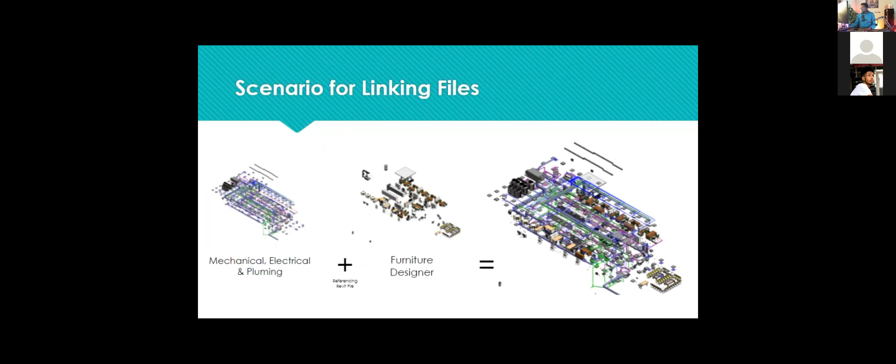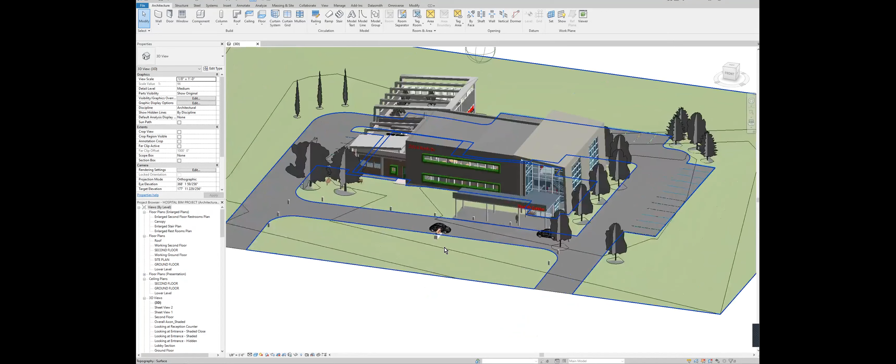So this is an example of linking files in Revit, and I'm going to show you that on another screen. Just give it a moment. So I can share a portion of my screen. Okay, there we go. And you're seeing the Revit screen now. All right, so this, for example, is a project that has elements that are linked.

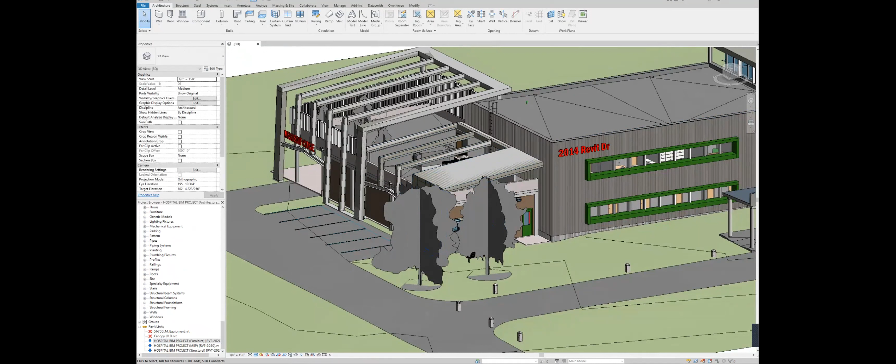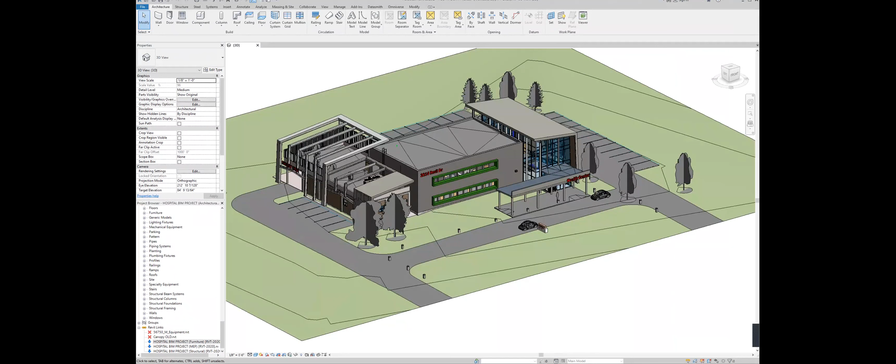Now, from what you can see here, this is the architectural component of the building. But if you look down in this corner here, which I know you probably can't make out the text, you can kind of see where these files are linked. And what you can see linked is the furniture, the mechanical, electrical and plumbing, and then the structural, all linked together.

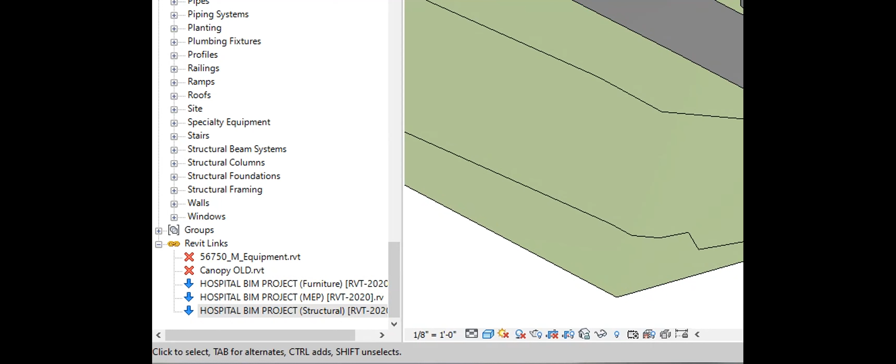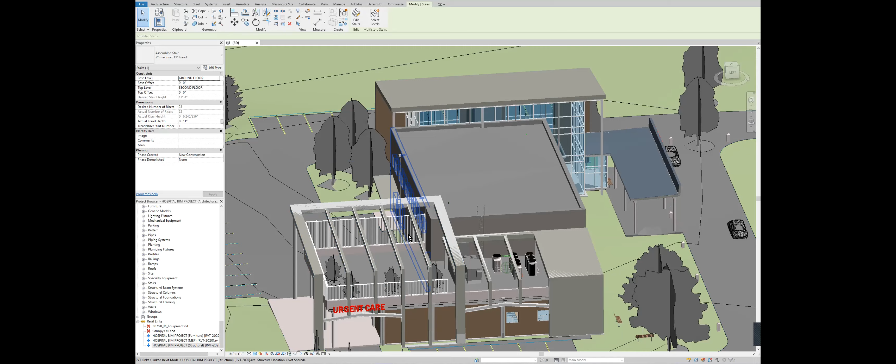If I kind of zoom around here - I think this is moving this, oops sorry, I need to maximize this. I'm going to try to zoom in and zoom out so you can kind of see the differences here. All right, so you will notice that there are MEP elements in this drawing.

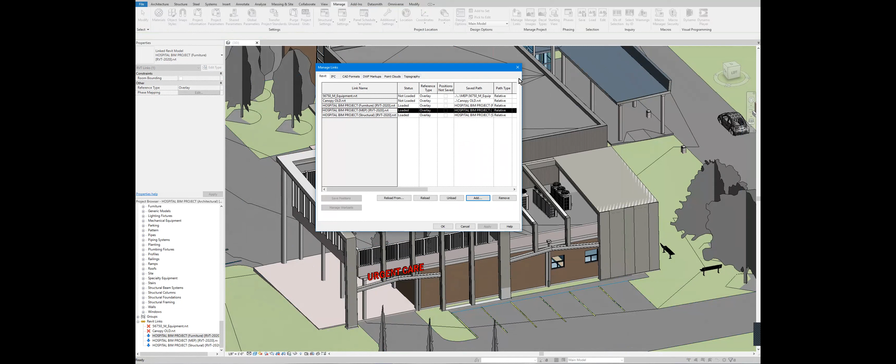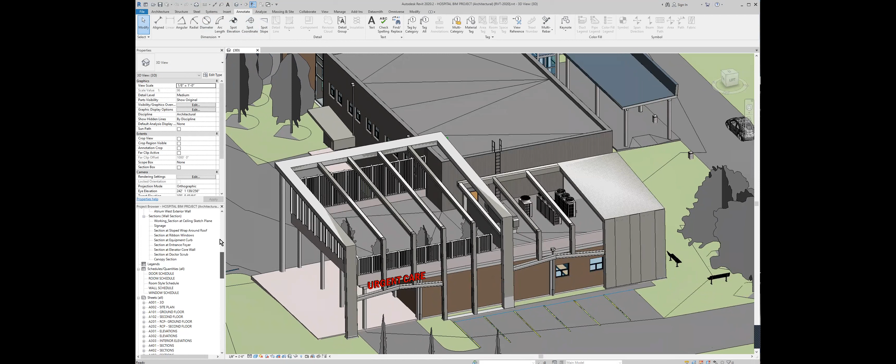And what I'm going to do is go to Manage, and manage links. There are our links there. And what I'm going to do is... this Zoom is kind of blocking my icons, give me a sec, there we go.

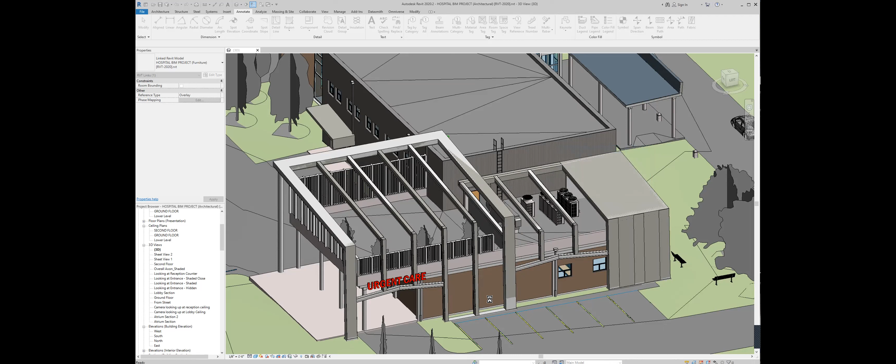Yes, I know Revit. I know. Let's let that load in.

This is all the furniture laid out in that project, and this is another Revit file, just the furniture. In placing this furniture, let's say it's an architectural designer in the office who's only responsible for laying out the furniture. What they would do is reference the previous drawing, which is a linked drawing.

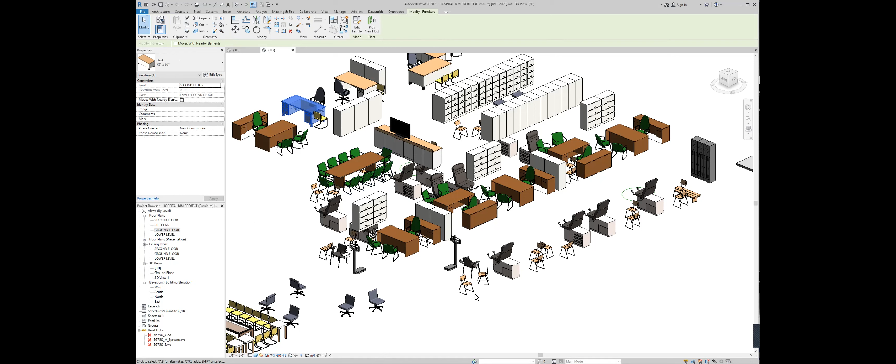I should probably open more than one Revit so you can see it in action. Right now that reference isn't linked because it's turned off, and only what this person adds is what's seen here. This person can enable the entire architectural segment of the drawing, or disable it - that's essentially what linking is. You reference the original file, and then add your layer on top of that layer. That's mainly the traditional way of doing it.

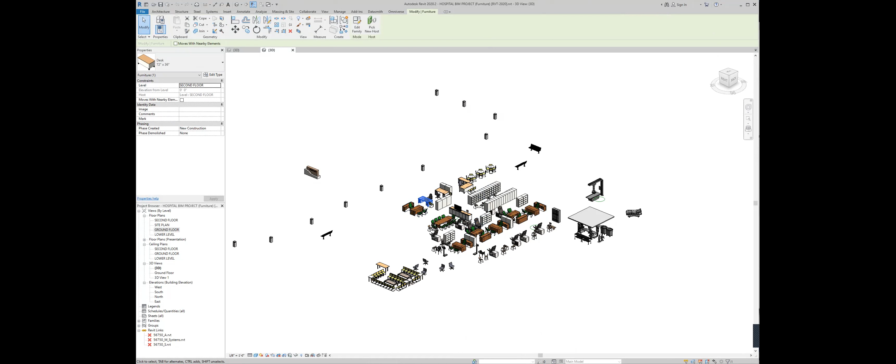Let me switch back here to this guy right here. Essentially what you do is say, well, the mechanical plus the furniture equals mechanical and furniture.

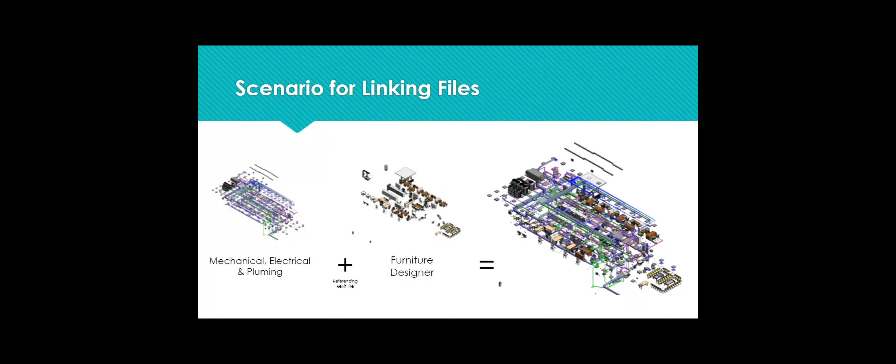The two files, you can't edit. The person doing the mechanical can't edit the furniture designer's work because that's a different file they have working with - that's a different Revit file. So at the end of the day, those are individual files that individual persons work with, which you can kind of see here, there they are. These are the different files, and one person has this file working with, another person has that file, and so forth. But the disadvantage of working this way is that you can't edit each other's files.

So if a wall needs to be moved, you have to call your team member. We have to tell them, all right, Donald, can you move that window in that wall? Which is going to be kind of annoying to do every single time.

Now the scenario for work sharing is that it allows multiple team members to work on the same project at the same time. This is what we're going to be doing for this major project. Essentially you have one central model, and then you have what's called work sets. Work sets are kind of like layers.

For those of you who have been using Revit so far, I guess you realize Revit doesn't really have layers, right? It's not like AutoCAD or Photoshop that has layers. But it has layers in the form of work sets.

A workset is like saying, hey user one, you own layer one, user two, you own layer two. Though they own it, what they're really doing is issuing permissions of access to modify that part of the model. So user one can say, okay, though I own this section of the building, I can allow anybody to modify this part, or I can say no, I don't want anybody to mess with this part. Or an administrator can override that and say, okay user one, I'm going to open your section of the building so any user can modify that section.

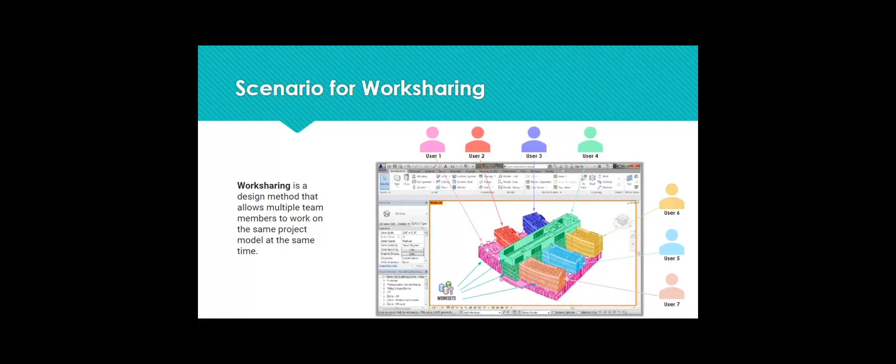All right, are we understanding so far? Any questions? No, sir. Nope. Okay, all right. I hope we're all here - I mean it's only about 4 of us, but anyway, proceeding.

Now how this works is that there is a central file, and for that central file, all users would need to have access to it. So it needs to be in a location you can access - on a network, in the cloud, somewhere where user one and user two, though they have different computers running, can go to a common location to access this file. So that's the first thing.

Now what happens is Revit will enable the feature of work sets, and what work sets does is divide the model into different sections. By default, you have to set this up - it's like layers, like when you open, what program do you guys use?

Everybody in here use AutoCAD? You've used AutoCAD before? All right, everybody's used it before. Everybody in here use Photoshop? So that's one example.

When you open up Photoshop, you have a layer working on. You can decide to do everything on that layer, or create a new layer so you can better control your model. So what worksets does is give you the ability to create these quote unquote layers, but it's not created by default. By default, the entire model is one big layer, and then you decide what section is divided into what section.

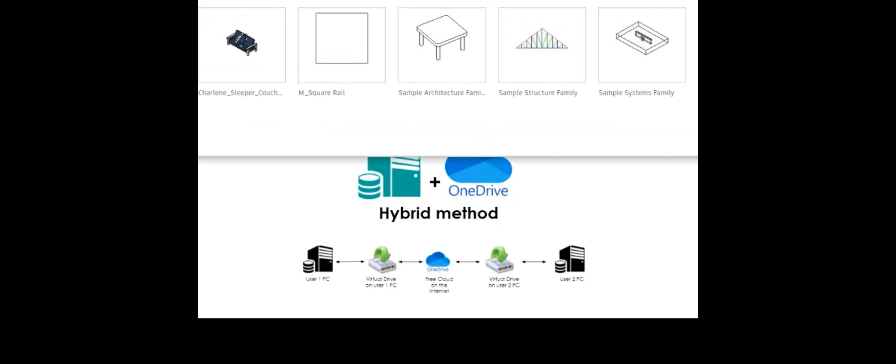And how I will do it is I will close this. I'm going to use this interesting method here. I need my mouse, one sec. All right, so I got a laptop and a desktop, and I have like two mice here, so I'm simulating fully what it will be like to have two persons using this. So you just need to multiply this process by everybody else, right?

I'm going to use a program called AnyDesk. Now, this program I think everybody needs to have, because if you experience any technical problems, this is how I'll be able to help you solve this by getting access to your computer.

All right, now what I'm gonna do is, there we go, kind of share this. Setting this up. Change my paper background to, where is the thing, to a color. Yeah, all right.

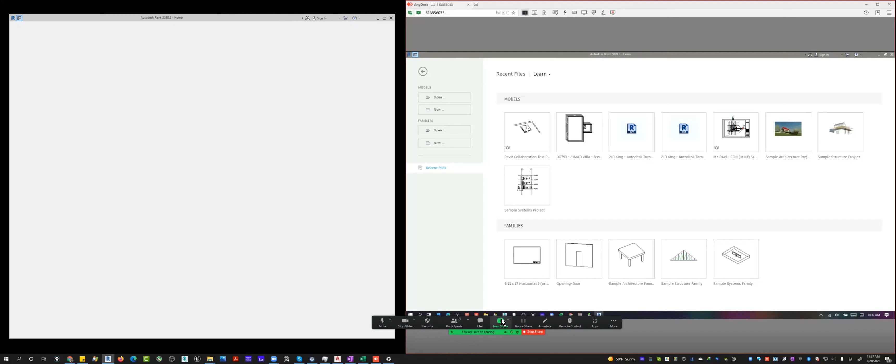All right. Okay, now I need to share this in high resolution mode, so let me do that. There we go.

All righty, I'm gonna put this in the middle here. I'm gonna try to do this very interesting setup here. Okay, now what I have here is, carry this over somewhere. So there are two computers that you're seeing here, right? On the left is user one, the desktop, and on the right is my laptop. I'm using the laptop via the AnyDesk application that allows me to remotely use the computer, so it's fully acting like a remote computer. And both of them are connected to the internet.

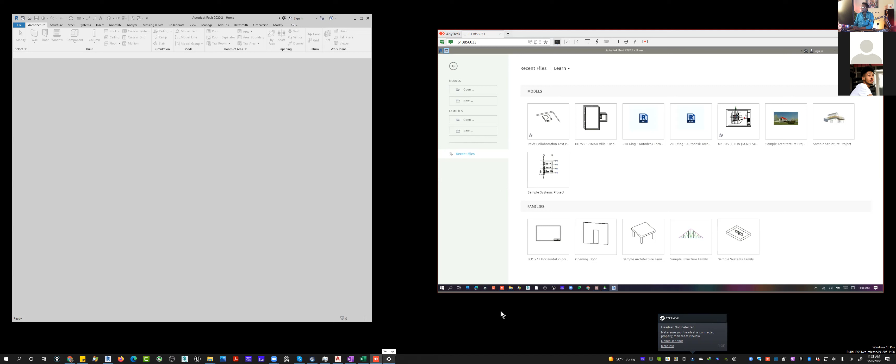All right, okay, so let me change my sharing method to one that I can zoom if necessary. If I need to zoom into a particular thing, I can just do something like that, and it will zoom, and I can zoom out like that. All right, good, lovely.

Okay, now the first thing is that you guys are going to need to access the virtual drive software, and that should be on the website. Let's jump over to the website real quick. All right, and student computing, and we're going to go to BIM. Hope it's still there. Try and locate that quickly.

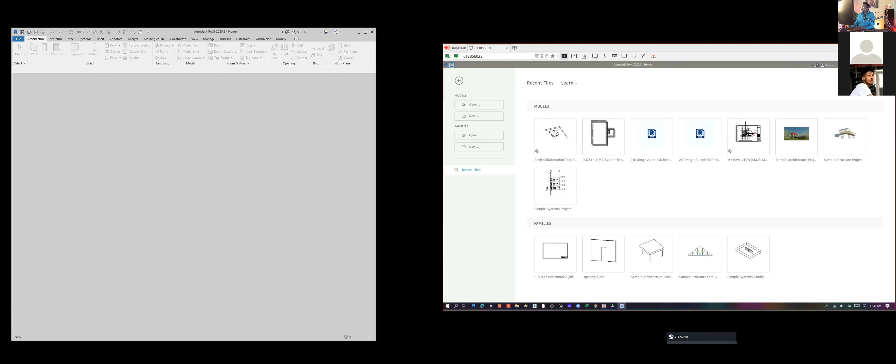All right, there we go. So when you go onto the website, I'm just gonna switch monitors here real quick, make life easier. There's a quick switch button that Zoom has. Okay, so when you go to the website...

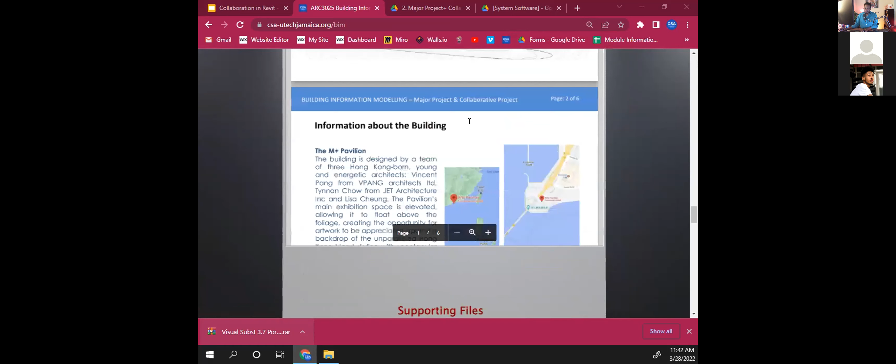This is the website that we have here. We're gonna scroll all the way down till you get to individual and major project. You continue scrolling down, and right below the handout section, where you see supporting files, you will see a compressed file that says Visual Subst. All you're gonna do is just click it, and then click download.

There we go, and it will be in a zipped file. When you proceed to that zip file, you're gonna need a software called WinRAR, which is like WinZip—it's a program that compresses files.

Let's wait on this thing. Yeah, right. So this is what that file should look like when you have WinRAR installed. All you have to do is extract this, and you extract it by right-clicking and saying extract—this is how you extract files normally. But for this one, you're going to need to use WinRAR.

And I'm going to choose where I want to extract it, which is that same location. Actually, I can just right-click and say extract here. It's going to ask you for a password, which is 1234. And there you go—you go into this folder here, and that's the program right there. All you have to do is just run it from that folder. You can put this folder somewhere where you can remember it, because this application needs to be running in order for you to synchronize with files.

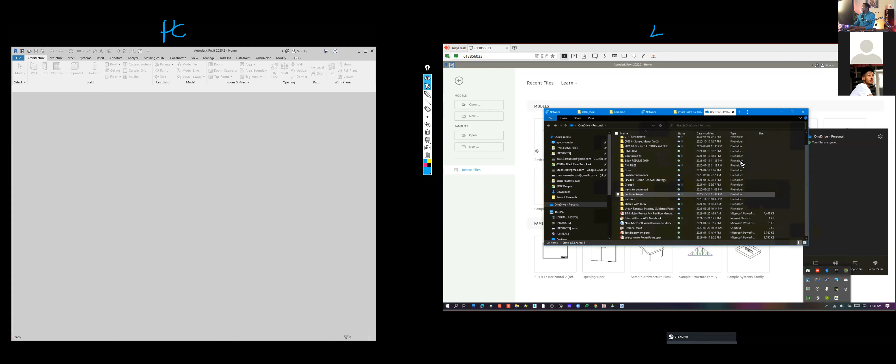On the laptop, the first thing you're going to do is make sure you have OneDrive set up. After you download it, make sure you have the virtual program. If I look down here on my bar, I'll see I have OneDrive already set up. I can double click that. This is what my OneDrive looks like. OneDrive comes with Windows, so you probably notice it pops up and gives you all kinds of annoying things usually.

Now on the desktop, which is here, we go. OneDrive, just waiting... There we go. This thing is kind of blocking me. There we go, good. So here we go, this is the OneDrive on the desktop. So it's all set up and good to go.

Now, basically what you're going to do is create a folder on your OneDrive. This is the BIM Manager folder. And then they're going to share that folder with everybody else, and that folder will be the basis of where all the files are located.

Now this process, I'm going to encourage the BIM managers to do on the internet, meaning in a browser, not on the computer. It makes life way easier. So on the computer, you want to ensure that everyone has OneDrive installed, definitely, but when you're distributing that shared folder to the different group members, I want you guys to do that from the cloud. I'm going to assume that the laptop, which is where you see the L, is going to be the BIM manager's computer. So let's say that's the person that's going to host the central file and share it.

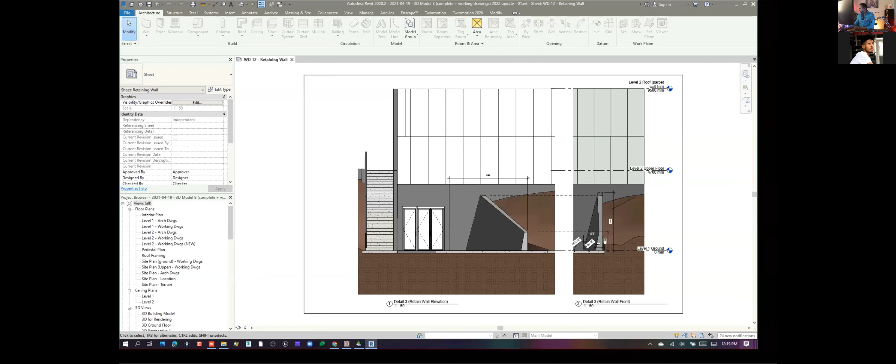All right, great, this is what it looks like. Let's look at the 3D view to see what the model itself looks like. This model is basically complete.

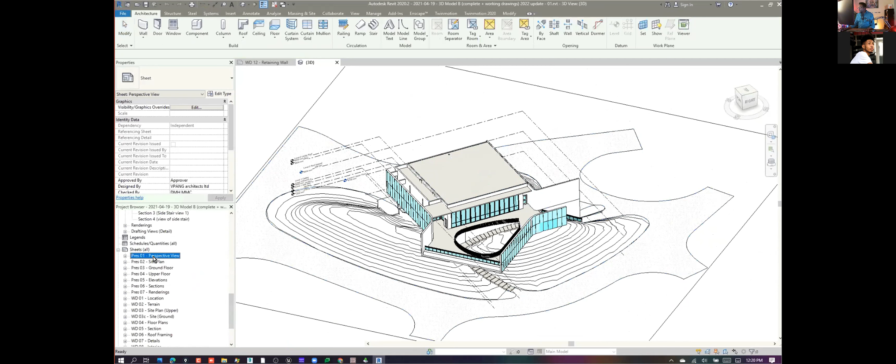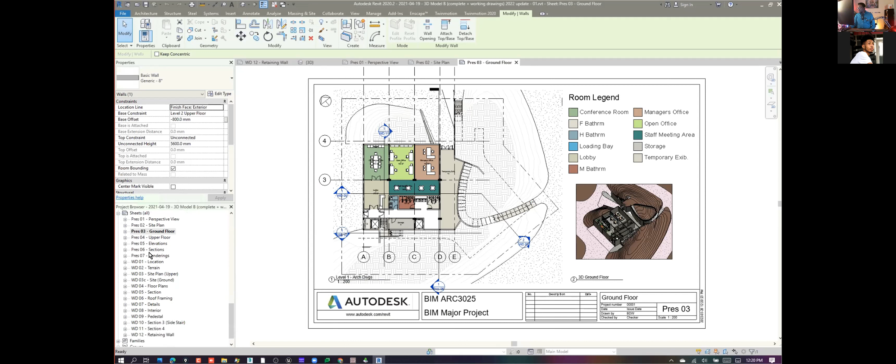Let's look at the drawings that were produced, so let's look at the sheets. We can see that we have a perspective view, a site plan, and floor plans. So this is pretty much a complete project. When you're selecting the project that you guys want to work from, you want to select somebody that has pretty much completed all of the project. I'm hoping that's everybody, by the way.

Notice that I have all of my views set up that I would be delivering for phase 1 of the project, which is to deliver the design drawings. I have my terrain diagram—this even has a little bit more, it even has roof framing, and you weren't required to do roof framing. Anyway, so this is what this project looks like, and that's great.

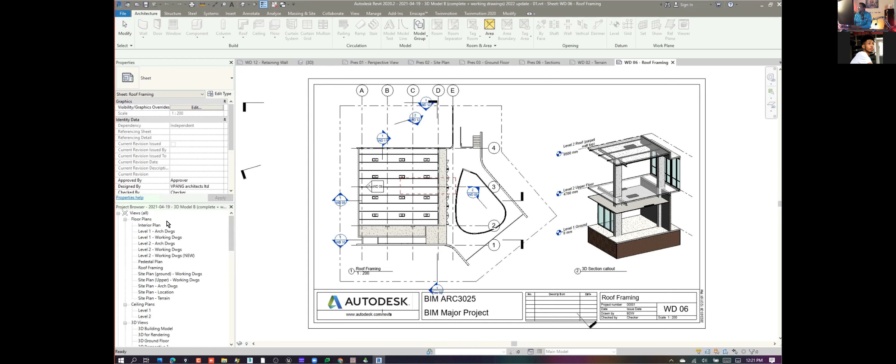Now it's time to turn it into a shared project. To do that, I'm going to close most of these windows just to not have a whole bunch of stuff open. Now, in order to turn this into a shared project, I would need to go over to Collaborate and click Collaborate here.

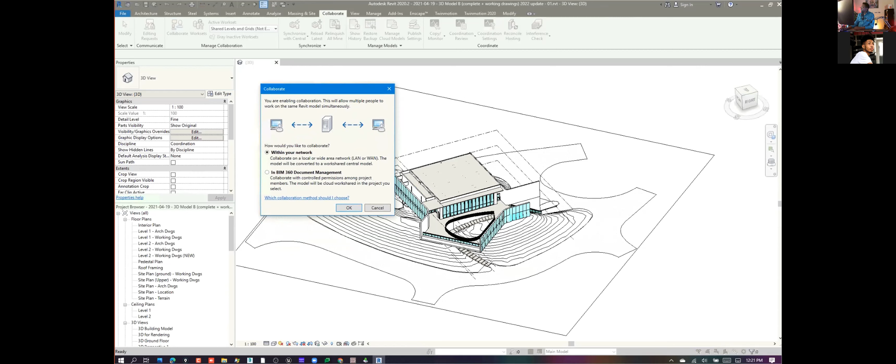Once I click Collaborate, I'm going to be presented with this question: do you want to use this within your network, or do you want to use it in BIM 360 document management, which is the cloud? Now remember, we're not going to be using the cloud because that is a subscription service and you only get a free 30 days, and you have to be using the legit student version. So we're going to choose within your network, and click OK.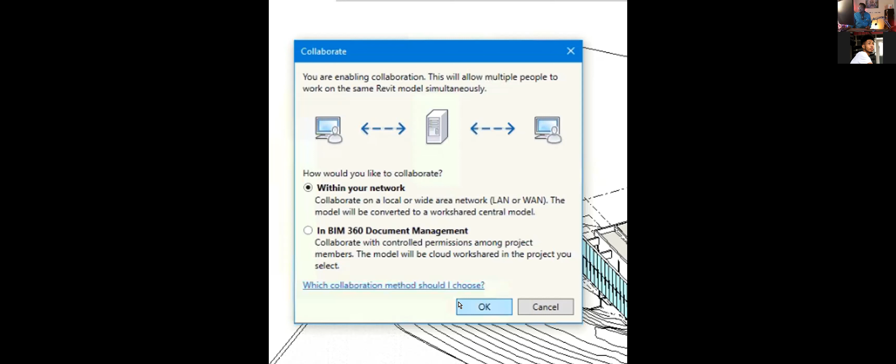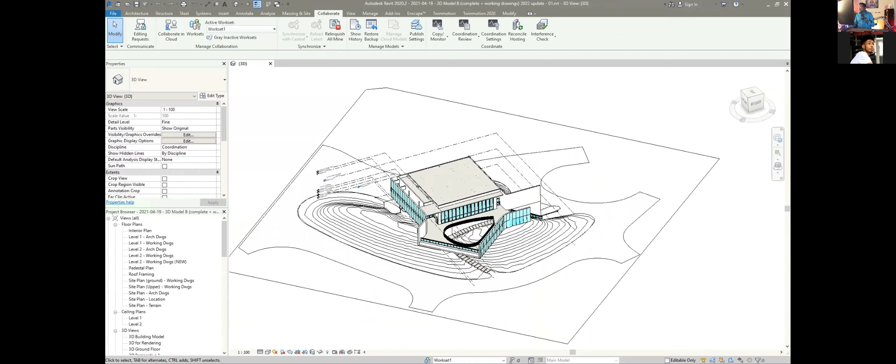Now once you do that, nothing will seem to happen—you'll be like, okay, nothing has happened. But actually what has happened is that Revit has now changed this from a regular Revit file into a collaborative Revit file. It won't give you any indication right now that it has done that, but it has indeed done that.

Now, while you're in the collaborative version of the file, you will notice that the work sets become active. When you click on this, you will see Work Set 1. Remember, work sets are like layers. Revit intends for you to work where you say, I'm going to create a layer, and Kira will work on this layer, Donna will work on this layer, and Robert will work on this other layer. So that is what the work sets are.

Now, interesting thing—you don't have to divide the building into layers.

You can do a little bit of a Wild West, first click first serve option, which means that if Donald comes in and clicks on this wall, then if Kira comes in and clicks on that wall, it's going to say Donald is modifying that wall, so you can't change it. But Kira could click on the wall beside it and start to modify that wall, and so forth. That's like a little bit of Wild West, where anybody can modify any file. We're going to simulate that to see what that looks like. So now you have work sets enabled.

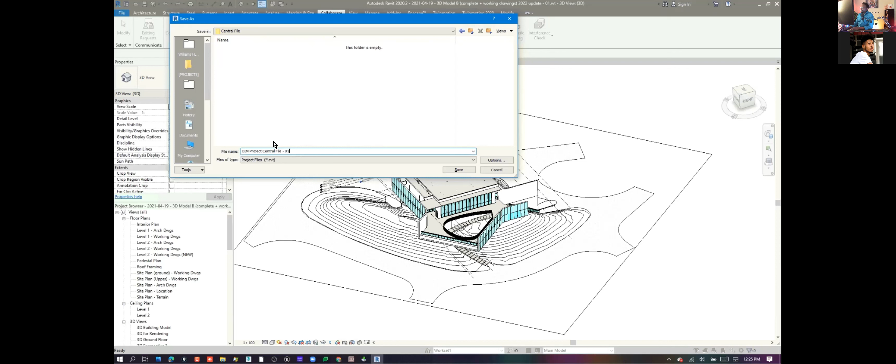So you're going to go in there, and usually what I recommend is that you rename the file. You can probably call this BIM Project Central File. I love to always put numbers at the end of my file, because if something gets messed up and you have to create a new central file, that could be version 2 and version 3. Hopefully that won't happen. So I'm in the habit of always putting 01 at the end of my file. I'm going to put 01 there and save.

Once I've done this, I have now created a central file. As the BIM Manager, I am now going to close this central file. Before I close, I'm going to click this option right here—this part is important—and say relinquish. Now what relinquish is saying is, remember we talked about work sets. Right now this file just has one work set, one layer, and the entire building—everything here—is just on one layer. That one layer is owned by whoever this person is signed in as. In this case it's signed in as laptop, so laptop is the person that owns this layer. We don't want that to happen, so we're going to say relinquish. What that does is say the work sets layer does not belong to me.

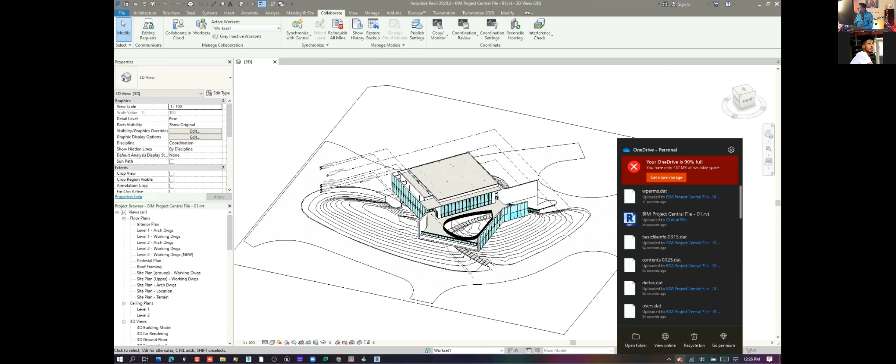Uh-oh, I'm running out of storage. Oh boy, oh boy. Okay, so let's try deleting some files in OneDrive here.

I'm glad I'm experiencing this, because guess what, it might happen to you as well. So remember, you need at least, I think, 300 megs to do this project. What can I delete? Okay, this is pretty big—I'm just going to remove this, and that should free up my OneDrive. I'll let that go on working in the background.

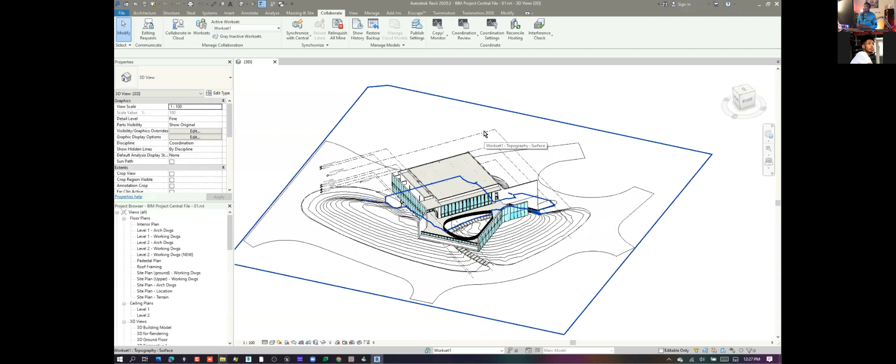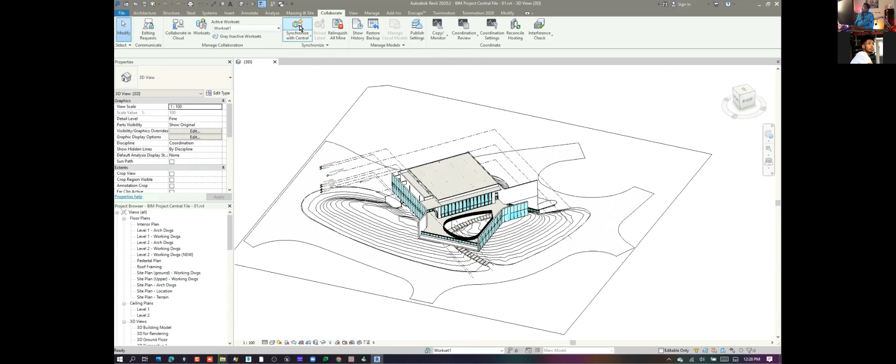Okay, so yes, make sure that you have enough space in your OneDrive. Back to what I was saying: what I did was choose to relinquish, which means I don't want to own work set 1, which is basically like layer 1, which is all the objects in the scene. Now once I've done that, I want to synchronize this with Central, so I'm going to choose Synchronize. This is the icon here, and it's going to do a little thing and nothing will happen, which is fine—that means it's synchronized just fine.

What I'm going to do now is close this project. Now if you look in your OneDrive, I'm going to go into Drive U—remember, you're always going to be browsing from Drive U. That is super important; once you're working on this project, you should be using Drive U. When I go to Drive U and go to Central File, you'll see these files in this folder: the actual central file, and a folder called Central File Backup. You don't want to mess with these files, just leave everything as is, but that's an indication everything is working just fine.

All right, great. So let's go back to both computers. We're just about wrapping up now. So are there any questions thus far? Is there anything that seemed confusing to anybody?

Nope. No, sir. All right, cool. Cool, cool, cool.

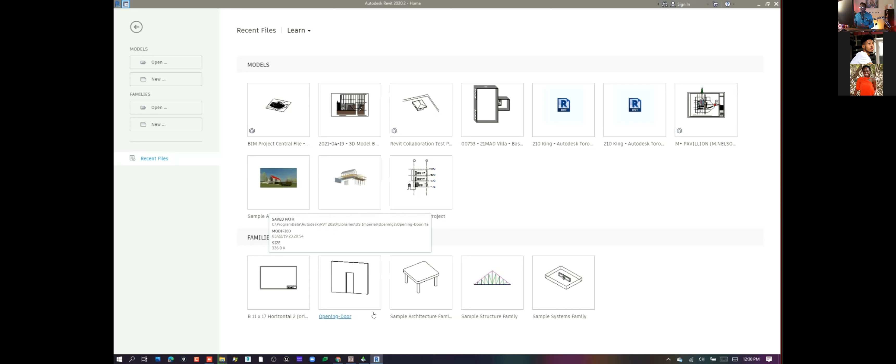And that's the way how a central file operates. All right, okay, so let's look at both computers now. Remember, on the right we have the laptop, and on the left we have the computer. So those are the two users. Now, the laptop is the BIM manager, but now that his job is done - he's done setting up the central file, setting up the network - he has now become a regular user, just like everybody else. He has no special privileges over any user that uses this file. So what's going to happen now?

On the lab, let's go with the desktop first, which represents your group members. That group member is going to go to open, and notice that I am going to open the file - I'm not double clicking on the file. I'm going to recommend that as a best practice, especially when you're working collaboratively. I could have just gone to drive U and go to central file and double click it. If you do that, it will work, but I'm going to recommend that you don't do it that way.

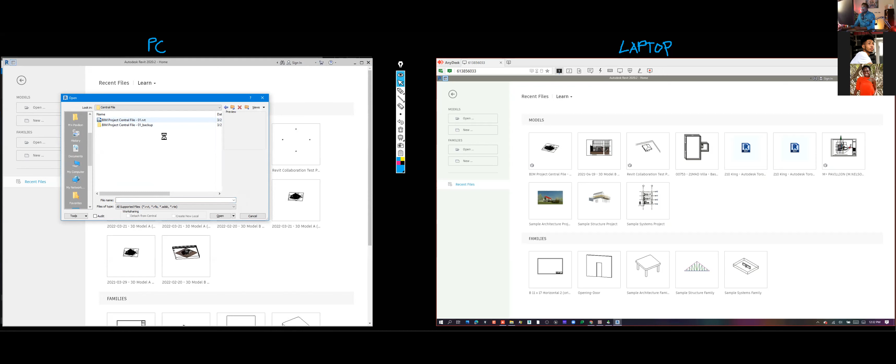I'm going to recommend that you open Revit first. You go to open, browse to drive U, go to central file. Remember, you have to open the central file first. And when you open it, you should get a message. Maybe. Yes, should. Or maybe not, but okay.

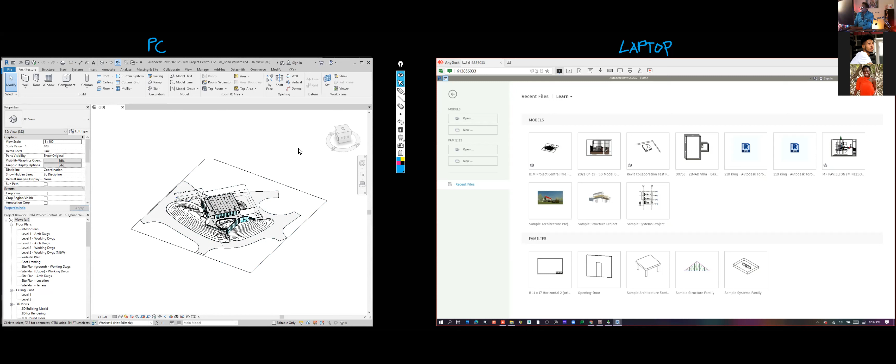And the same thing for the BIM manager, who has now become a regular user. You're going to go to open, and go to the same place - drive U - just the same way, go to central file, and open that central file now. All right, great. Now you may get a message.

That would say Revit is going to create a local version of this file. That's a normal message if you get it. It is just saying what we had said earlier.

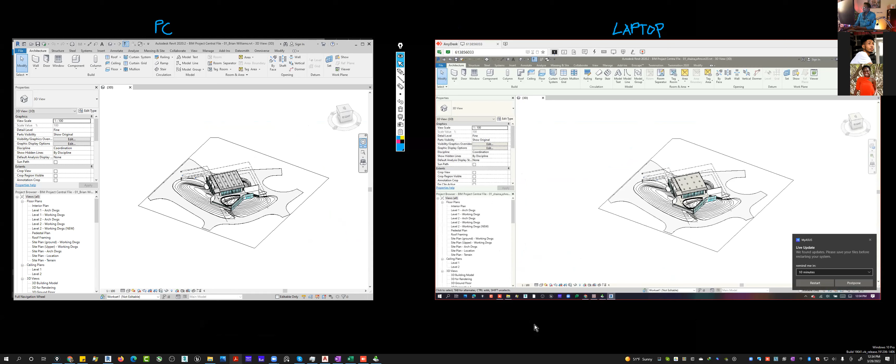Let me show you. Remember earlier we said that when a user attempts to access the central file, Revit really creates a shadow copy of it and then gives the user access to that shadow copy. So depending on the version, you might get a message that says, hey, you're opening a central file, Revit is going to create a local copy of the central file on your computer. And you choose okay, that's fine. It's basically telling you what this said it's going to do here. Sometimes it will tell you, sometimes it doesn't. It didn't tell me in our example just now. So sometimes it is, sometimes it isn't.

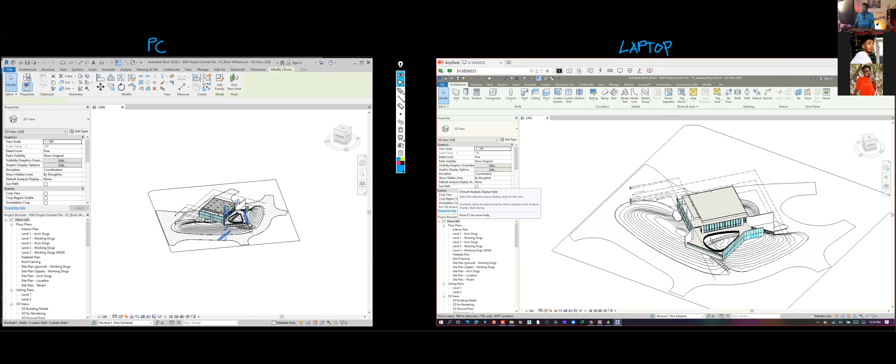Okay, all right. So now that these two persons open these files, they are now actually linked together. So both these persons can now work remotely on this file and it would now be synchronized. So let's simulate that.

As a matter of fact, before I start to work on anything, what I would do, because Revit didn't create that local copy of the file for me, I would now go to File and go to Save As. And I would save this version of the file on my computer, meaning I don't need to save it on the drive U.

Where am I going to? My computer, and I can save this on my desktop. Remember how Revit works: you are not manipulating the central file, you are really just manipulating a shadow copy of that central file made for your user. So I'm going to save this on my desktop and call it... well, look what it called it: BIM Project Central File, Brian Williams. It actually named it after the user I'm signed into Windows as on the computer.

Let's go over here and try to save this file from the laptop, and let's also save this to the desktop of the laptop. Okay, and it called it Bim Central File. I'm not sure why I put this here, maybe because that was the user who created this file. Maybe that's the scenario. So I'm going to put Creative Masters. All right, so this is my file here.

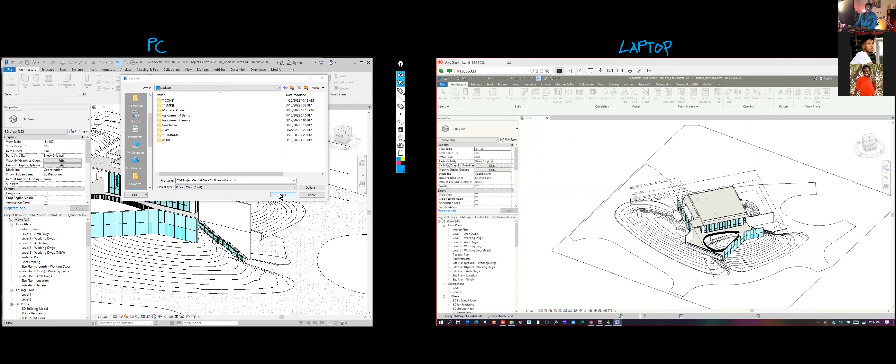I'm going to save it on my computer, and on the desktop I'm going to save that there. Remember, these two persons could be in two completely different locations, doesn't matter, because these computers you're seeing here are only connected through the internet.

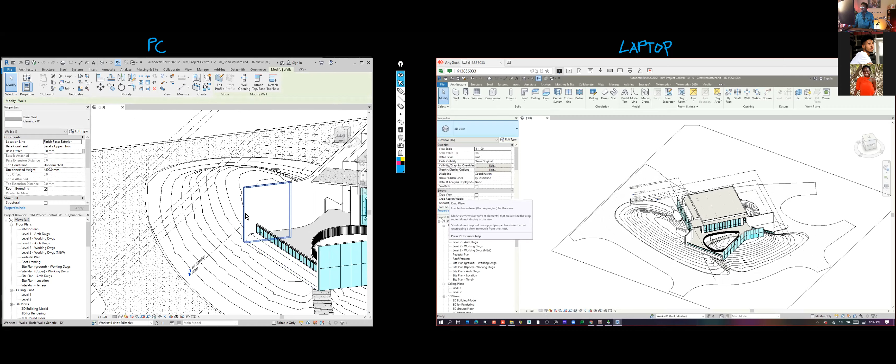All right, so let's start manipulating stuff now. You can use Revit like how you would normally use it. Let's say I needed to make a change, let's make this a little taller or something. Now, when you click on files, you're going to get this little icon here. I don't know if you can see it, let me zoom in here. You're going to get this little icon whenever you click on objects.

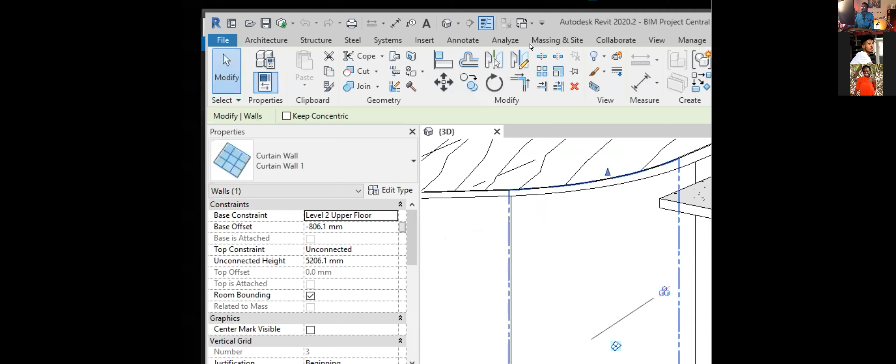That's simply saying that this object is up for grabs, meaning if you click on it and edit it, the next person who has access to this file can't click on it until you synchronize. Let's give that a test. I'm going to click on this curtain wall right here, with the intention to modify it. I haven't modified it yet, I've just clicked on it.

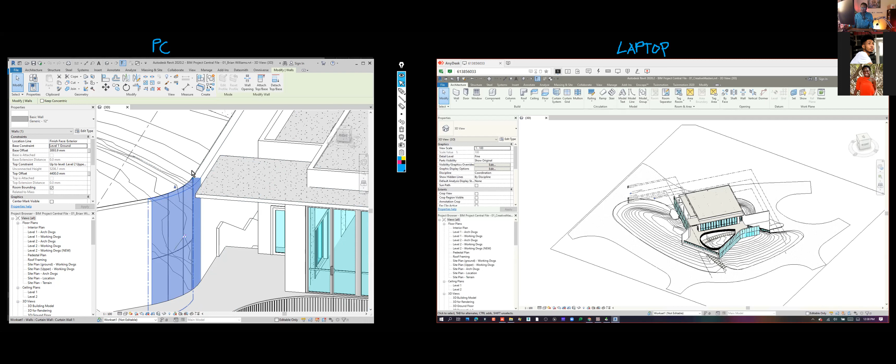Now I'm going to do the same thing on the laptop. Let's say I'm on this laptop now in some other location, and I also want to modify this curved wall, so I'm going to click on it here. Now I can click on it, no problem. The first person who clicked on it, which is the PC, I'm going to modify it. Let me drag this up a bit like that. And there we go, it has changed.

Now on the laptop, it hasn't changed yet because I have to synchronize that change. You don't need to drag a wall, synchronize, move a wall, synchronize, edit this, synchronize - that's not how you work collaboratively. You really synchronize as much as you would normally save, so you do it after a while.

Now on the laptop, let's say I also wanted to modify this wall, so I'm going to click on it. But when I click on it, I get this message here. It's saying, hey, can't edit this because Brian Williams - until Brian Williams resaves the element to the central file - which basically means I'm editing this element so you can't touch it. I can place a request saying, Brian, I really need to edit this element here. And then a message will pop up.

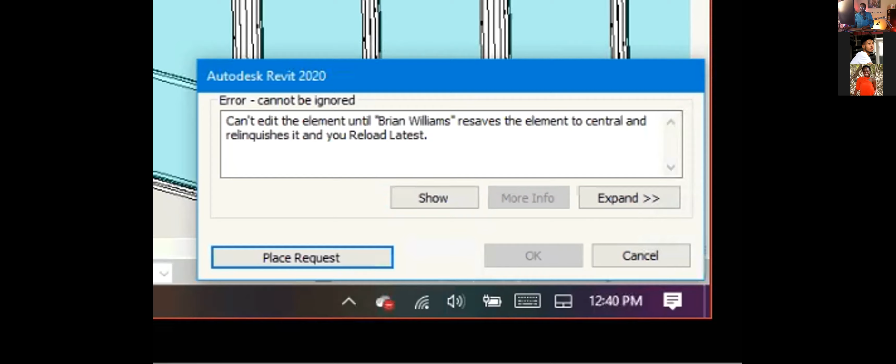Let's go back to both computers now. Now I can mess with something else, so I'm going to choose cancel there. Let's say I want to mess with this wall here, this parapet wall here. I can modify that wall, no problem, and it changes for me, no problem.

But what if on the PC I also want to modify that wall? Well, if I go over to that wall now and click on it and try to modify it, I'm going to get this message saying that this other person has modified that wall before you could click on it, so you cannot change that wall until that person synchronizes with Central. So this is kind of the wild, wild west way of working collaboratively - it's first click on, first serve basis. If I click on this object first, then it's mine until I finish messing with it. All right, so let's go back to the PC now.

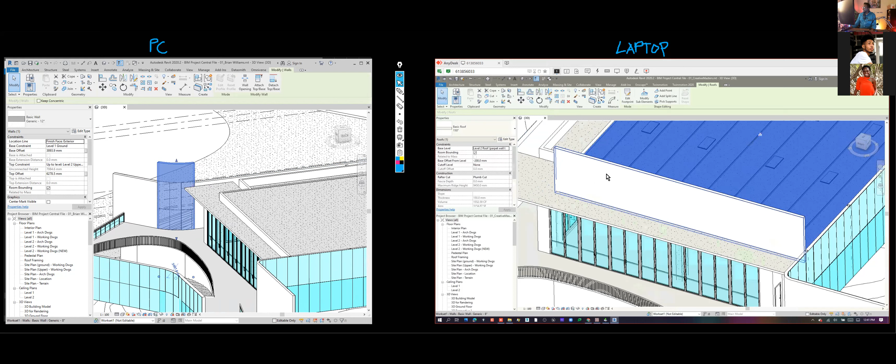Now let's say that I finished editing this wall and I've gone to something else. Even though I finished editing this wall, this person over here still can't click on that wall. Why? Because I have to synchronize to Central before the next person can edit something that I previously edited.

To do that, there's this little icon at the top, which you can see right here. This is the Synchronize to Central icon. This little down arrow will bring up options of how you want to synchronize. Right now this has the little green circular thing on it, which means that when you click it, it's going to bring up the synchronization dialog box, which looks like that. You can type a comment to say 'I modified this wall' and choose OK.

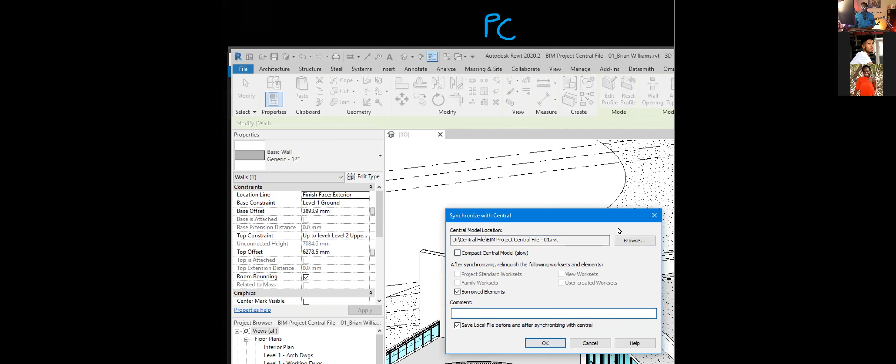But you don't have to synchronize this way, and I don't really recommend it, it takes too long. Instead, you can just click on this little down arrow and change it to the lightning, which means that it will just synchronize without you having to say what you did or why you synchronized. Once you do that, the computer is just going to flicker for a little while, Revit is just going to flicker, and that's it.

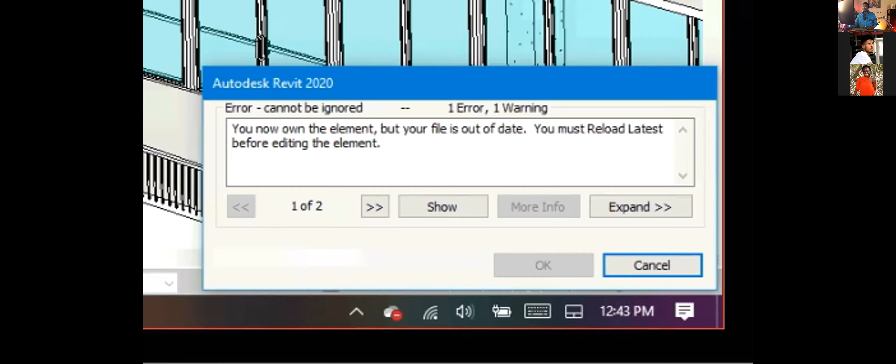Now that the PC has synchronized, it now frees up anything that you had previously touched. So back on the laptop, if I click on this wall now and try to move it, it's still going to tell me that this object was modified, so I cannot modify this object until I see the latest version of this object. Revit knows that somebody messed with this object, but what change was made, you're not able to see yet. So you now also need to synchronize with Central.

So I'm going to choose sync, the little lightning thing at the top. Now while you're doing this, you're going to see OneDrive doing all kinds of things. OneDrive is going to tell you all kinds of craziness, like files are being moved or deleted really quickly, warning that there's a lot of things happening with your OneDrive. Don't worry about it, it's just Revit doing its thing, and OneDrive is set up to give you warnings in case you're losing your files. But you're not losing your files, Revit is just doing a whole lot of things in the background, moving things around to synchronize stuff.

Notice that when I click sync, I got the new modification for this wall. But notice on the left hand side that when I click sync, I didn't get the modification for... you're getting those messages from OneDrive, ignore it, ignore it. So notice that this parapet did not update on the PC, and that is because I synced before the laptop synced, so naturally I wouldn't have gotten that change.

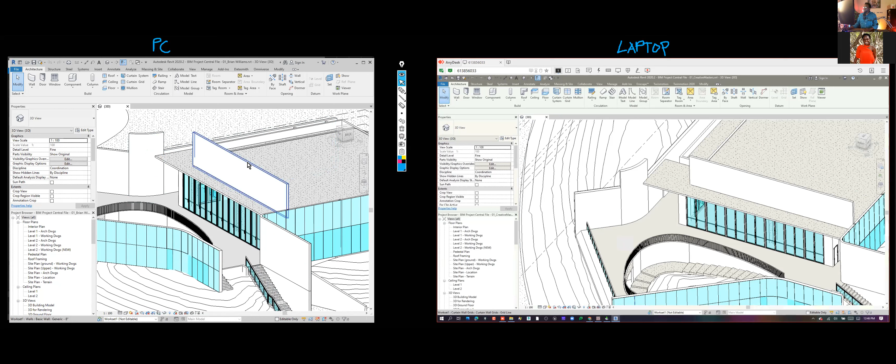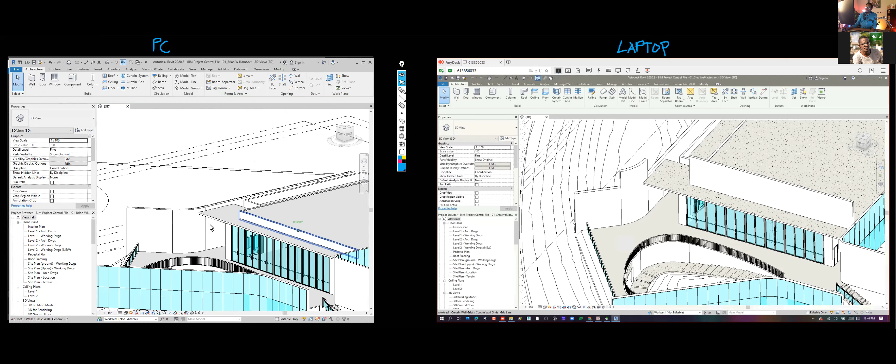So let's say that on the PC I say, oh well wait, this is an error, these two walls are not supposed to be this high. So I can say okay, let me just move this wall back down. There we go, and let me just move this wall here back down. I'm just going to use my align tool and kind of move that wall back down. Great, and then I'm going to sync to Central by clicking the icon there. As I said, syncing is kind of like saving, you're sending all of your adjustments to Central.

Now, well firstly, any questions so far on how this process works? Or maybe not? Anybody have any questions? Okay, guess not, all right, great.

So this is how you would use work sharing in Revit. Now, when you guys set this up, then we can look at how you would set up work sets so that you can designate who edits what.